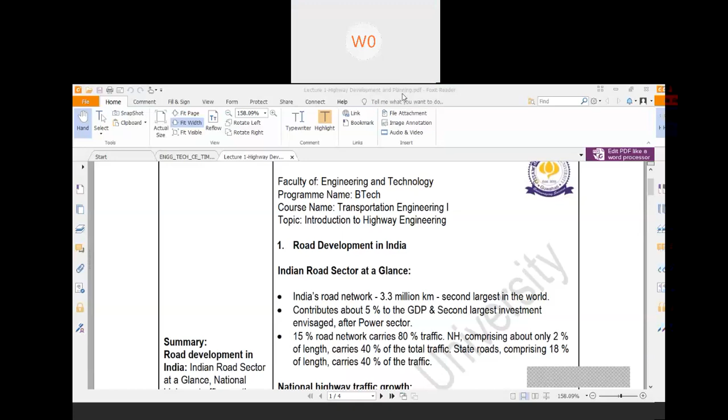Okay. So basically, Sir, yes, sorry, it's not audible properly. Sir, your voice is not clear. It is not clear now. Yes, yes. It's clear. Yeah. It's okay.

So in this subject, we will get to know about different aspects of transportation engineering. Whenever we are talking about transportation engineering, there are different parts of it. First one is surface transportation, air transportation, and water transportation. In surface transportation also, there are two parts, that is highway engineering and railway engineering. This subject will only deal with highway engineering.

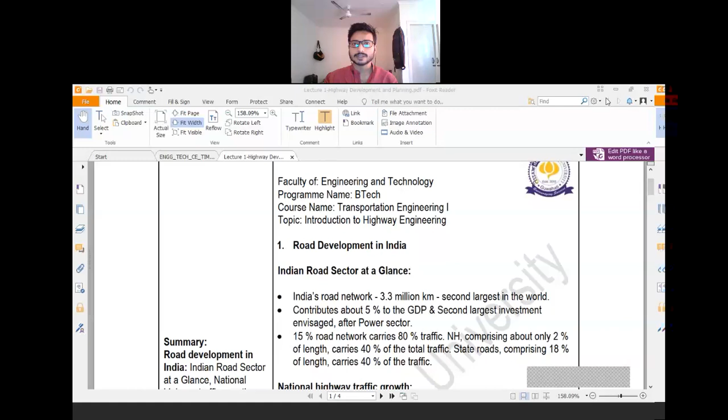Now our first part is road development in India. Before starting this portion, let us discuss the importance of transportation engineering. For the development of any area, transportation is very much vital. Without the improvement of transportation facilities, no place can be improved. For example, let us give a practical example. Suppose your college area, that is Downtown University.

If we consider that area is in a remote place of Guwahati city, now consider if there are no transportation facilities. Like if you consider 5 to 10 years ago, that area was very much remote, and the road development of that area was also very poor. There was no considerable road portion. After the college was established, there was a need for some development.

Okay, why is it needed? Because now accessibility has to be increased, so as to access the university and other facilities. So gradually that area developed. Similarly, for the development of any area, road transportation is very much important.

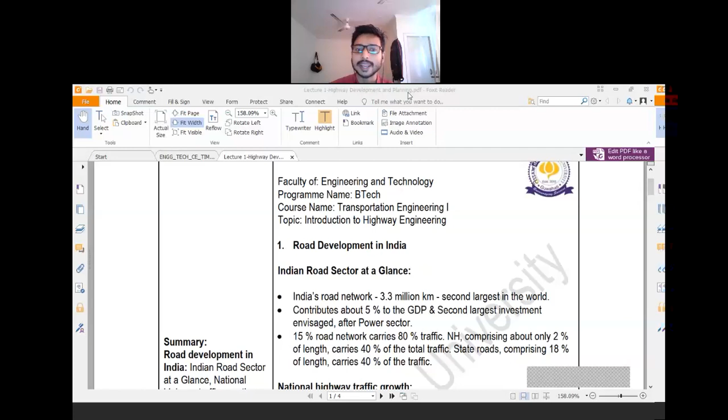The major roads in India are national highways and state highways. National highways comprise only about 2% of the total road length, but carry 40% of the total traffic. From this data, you can easily visualize the importance of the national highway. After that, state highways comprise 18% of the length and carry 40% of total road traffic.

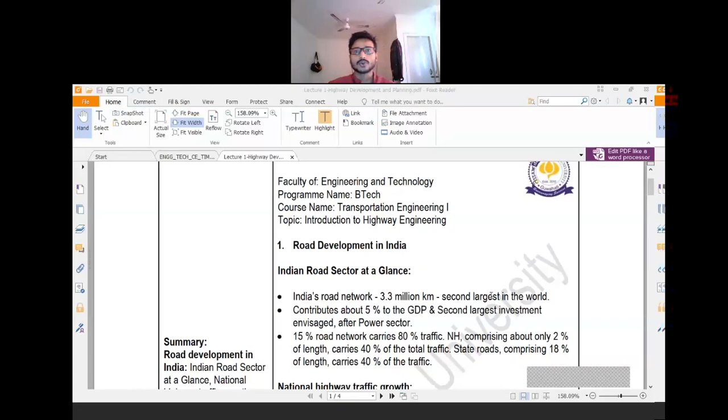Now, if we consider the national highway traffic growth rate, we can see that it is 7 to 10% yearly. For this traffic growth, the number of vehicles is also increasing very rapidly, especially in city areas. For this reason, traffic congestion, noise pollution, air pollution, etc. are also associated with the development.

Another thing is passenger traffic. Passenger traffic is projected to grow by 12 to 15% per annum, and the number of vehicles increases at 30% per annum. These statistics show the condition of road traffic. Since the number of vehicles is increasing at 30% per annum, we have to match that increasing number of vehicles and accommodate them on the road.

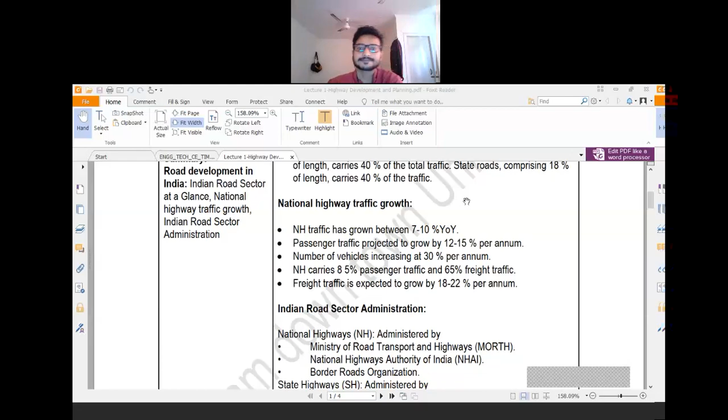Now, different types of roads, that is national highway, state highway, are monitored or administered by different organizations. So first one is national highway.

This national highway is administered by Ministry of Road Transport and Highways, called MORTH, a very important organization. Then National Highway Authority of India, that is NHAI, and Border Roads Organization. Basically, these organizations are responsible for the development and maintenance of the national highway, so they will generally call for tenders and other things.

Then state highway is generally administered by the state government, public work departments, road development corporations, and infrastructure development boards.

Then, if you come for the rural road, these rural roads are generally administered by Ministry of Rural Development, which is directly responsible for the PMGSY road construction. Then state government and rural road development agencies and village panchayat handle small rural roads.

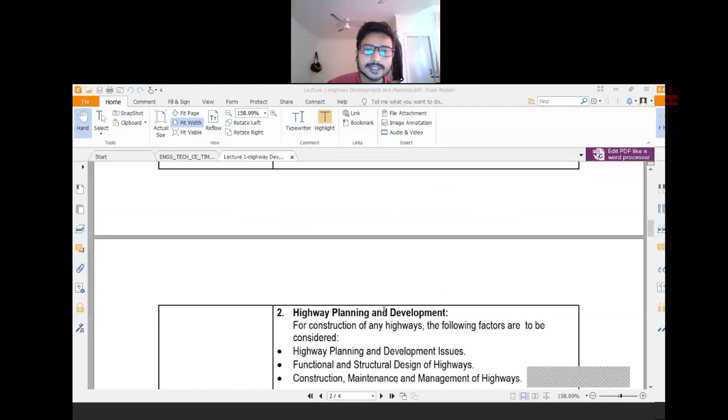Now, for construction of the highways, there are different factors which you need to consider. First one is highway planning and development issues. Whenever you want to develop one particular road, planning and development is a huge thing. You need to plan for that road, keeping in mind that road traffic in future will be increased.

You need to choose the different areas through which your road will pass. So that is a huge development and planning issue, and there are different activities related with it. We'll briefly discuss highway planning and development issues later on.

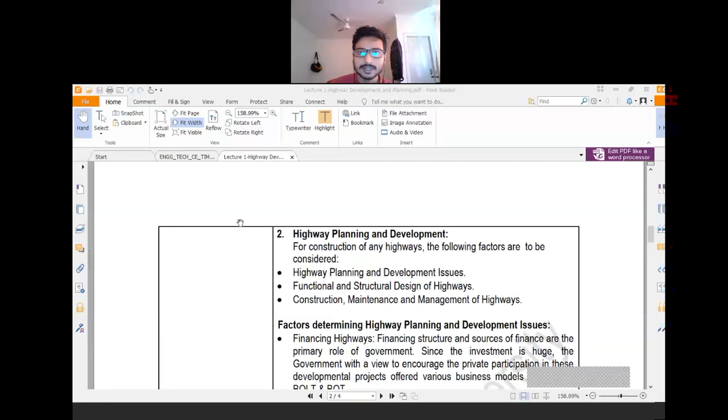Next one is functional and structural design of highways. After deciding the planning portion, the main thing is you need to consider the design of the highways. This design depends on road traffic conditions, number of vehicles possibly on that road, and the condition of the soil and surrounding, if there is any gradient, like if that area is hilly, mountainous, or a plain region.

After that, some issues are related to construction - how you will construct that road, from where you will get the raw materials - and then maintenance and management of the highways. This is a very vital issue. Sometimes after constructing the road, within 2 or 3 years that road gets damaged, so maintenance and management of the highway is a major issue.

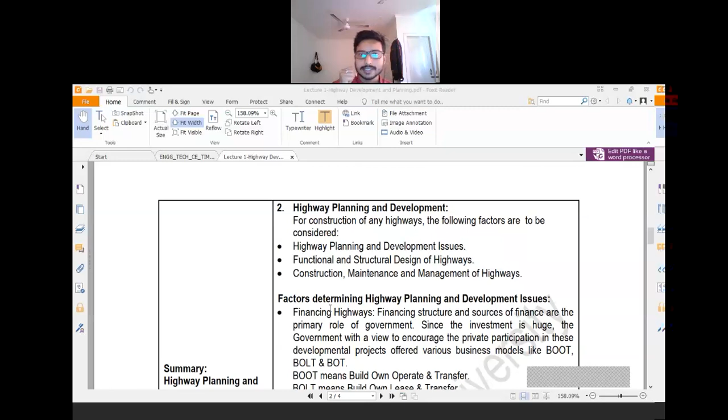Now, factors determining highway planning and development issues. First one is financing issue. Whenever you need to construct a road, huge financing is necessary. Now the question is, who will finance your road?

Who will finance your road? Generally there are different government organizations who are responsible for the financing of the road.

Now since the investment is huge, the government, with a view to encourage private participation in this developmental project, offers a PPP model, that is public private partnership, and they followed different business models. Now these business models may be BOOT, it may be BOLT, or it may be BOT.

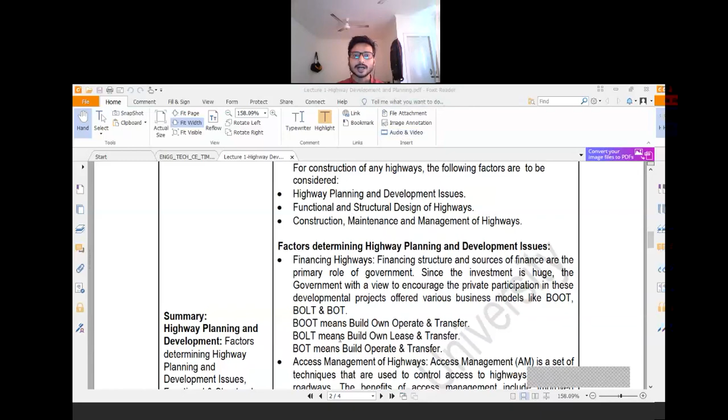Now the question is, what are these? BOOT means build, own, operate, and transfer. In that case, government will build some road. After that, they will lease this property to some private operators, and that private operator will be responsible for the maintenance of that road for a particular period of time.

Now, in that particular period of time, to bear the cost of the maintenance, the private operators will charge some money from the users, that is us, and this charging is generally carried out by the toll plazas. So after the lease period is over, the private operator will again hand over that project to the government.

Now, next one is BOLT. BOLT means build, own, lease, and transfer. In that case, what will happen? The private operator will build some portion of the road.

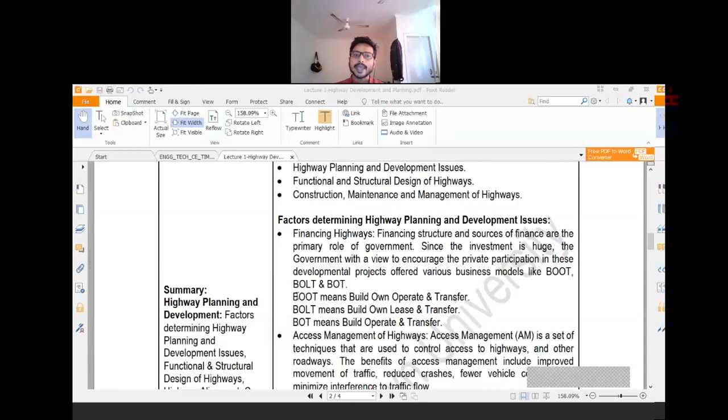After building, they will operate the road and charge some amount of money to use that portion of the road. Generally, this handover, that is this BOLT, is done for 30 or 35 years. After that particular time period, that private operator will hand over the total project to the government.

Next one is BOT, which means build, operate, and transfer. In that case, suppose a particular property is there, and that property is private property. So the government will lease that property, take the lease of it, and use that property by giving some money to the private operator. So basically, these are different business models which they are following for road construction.

Now, next one is access management of the highways. This access management is a set of techniques that are used to control access to highways and other roadways. Access means how you can enter the road portion. This access management is generally used for improvement of the road traffic.

There are different access management tools like signaling systems. This is also an access management tool, or some traffic plazas, or some underpass or overpass. These are all the tools of access management. Now the benefits of access management include improved movement of traffic, reduced crashes, fewer vehicle conflicts, and minimized interference to traffic.

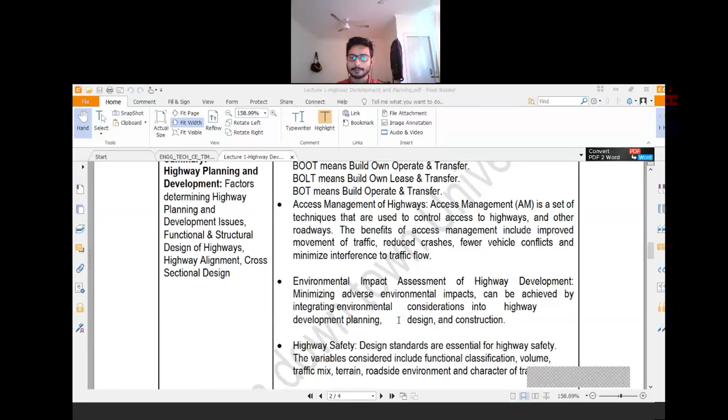Minimizing adverse environmental impacts can be achieved by integrating environmental considerations into highway development planning, design, and construction. So planting different vegetation is one type of development planning.

Then highway safety. Design standards are essential for highway safety. Highway safety means in terms of vehicle operation, road construction, and maintenance. So the variables considered include functional classification, volume, traffic mix, terrain, roadside environment, and character of travel.

This highway safety is also very much important. Suppose you are constructing a road in the hilly area. In the hilly area, it may be possible that you need to cut some of the hills. If that hill portion is not stable, it will lead to soil erosion and other adverse effects during the rainy season. So you need to look for that.

Another thing is you need to design your road based on the road traffic condition, that is the total number of vehicles which you are assuming to have on that road. Suppose you have constructed a road, and that road is very much narrower in accordance with the road traffic condition which can be observed over there. It will lead to traffic congestion and chaotic conditions. So this condition must be followed whenever you are constructing roads.

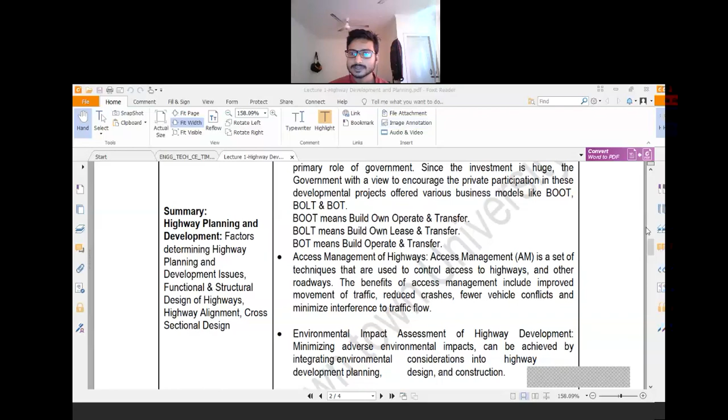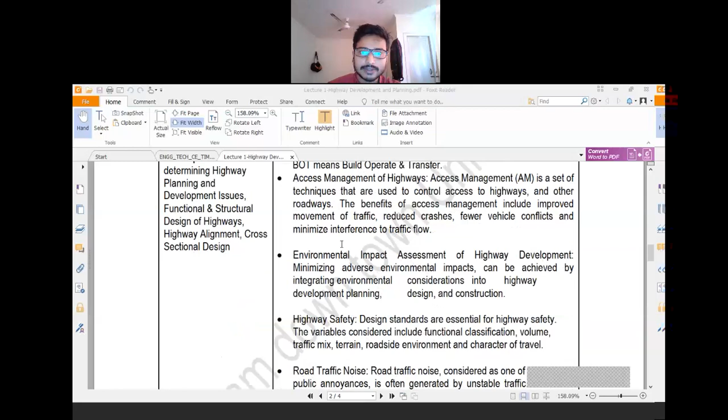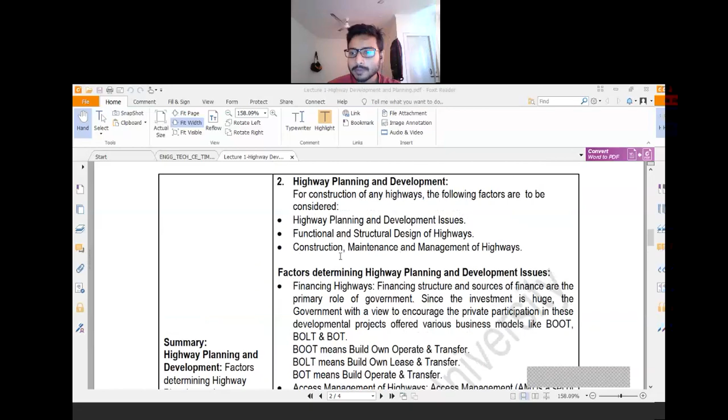Now, this portion we have discussed - the financing of highways, access management of highways, environmental impact assessment, highway safety, road traffic noise - basically all these things are planning and development issues. So before construction of any road, you need to consider all these factors.

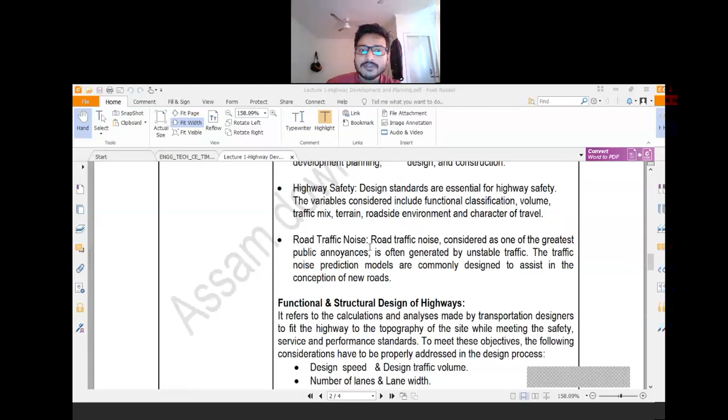So then we come to the functional and structural design of highways. There are different factors which govern the functional and structural design of highways. It refers to the calculation and analysis made by transportation designers to fit the highway to the topography of the site while meeting the safety, service, and performance standards. So based on the topography of the site, you need to design your road, and it should meet all the safety, service, and performance conditions.

Now, to meet this objective, the following considerations have to be properly addressed. There are different parameters which you need to consider whenever designing a road. The first parameter is design speed and design traffic volume. These two parameters are the most important parameters for designing any road.

Because from the traffic volume - traffic volume is the number of vehicles assumed to pass a particular section of the road in a unit time. Generally it is expressed as vehicles per hour. So basically traffic volume signifies the total number of vehicles over a particular road section.

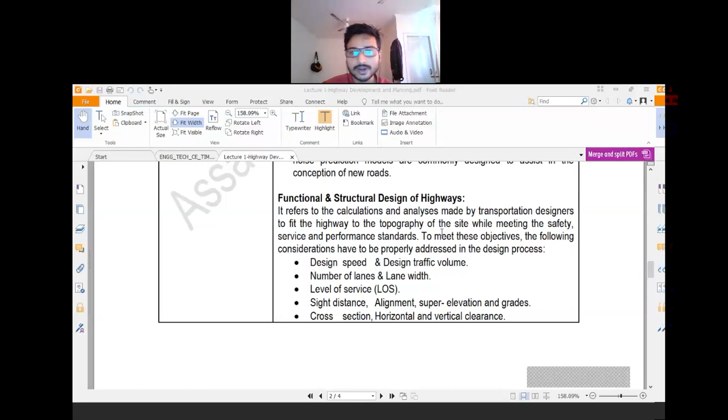Next is sight distance. Okay, sight distance is basically the visibility ahead of you. Suppose you are driving a vehicle. In that case, you need to see what is ahead of you. If you cannot see what is ahead of you, it will lead to an accident. So basically, sight distance is the visibility ahead of you. Now, for the straight path, this sight distance is not a problem at all. This sight distance plays an important role in the horizontal curve section and in the vertical curve section.

So in the horizontal curve, if visibility is not appropriate or not as per the design requirements, in that case the driver cannot see the vehicles coming from the opposite direction, and it can lead to some accident. So sight distance is very important. We'll discuss sight distance, with different numericals and derivations, in the later chapters.

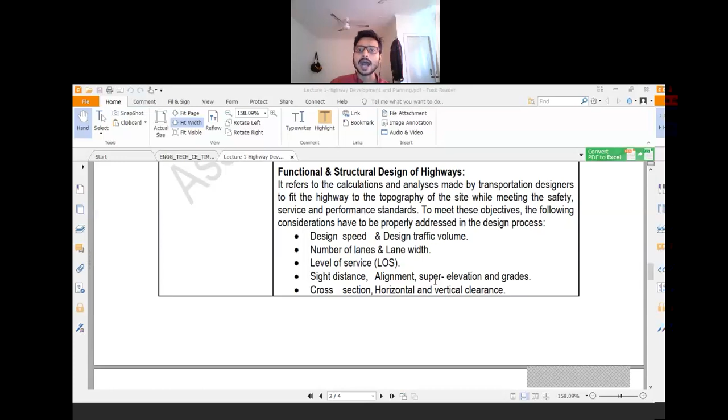Then alignment. Alignment is the central line of the highway. Then super elevation and the grades. Basically, super elevation is the portion of the highway which is raised in comparison with the other side of the road to nullify the effect of the centrifugal force in the horizontal curve. Later on we'll discuss super elevation; there are some derivations and numericals. Then grades. There are different types of grades, that is ruling gradient, plain gradients, etc., which we'll discuss later on.

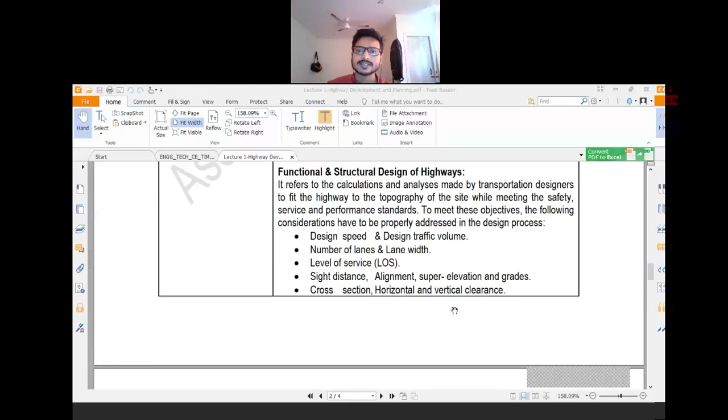Then cross section, there are different cross sectional elements, horizontal and vertical. Clearance or sight distance, these are the same thing.

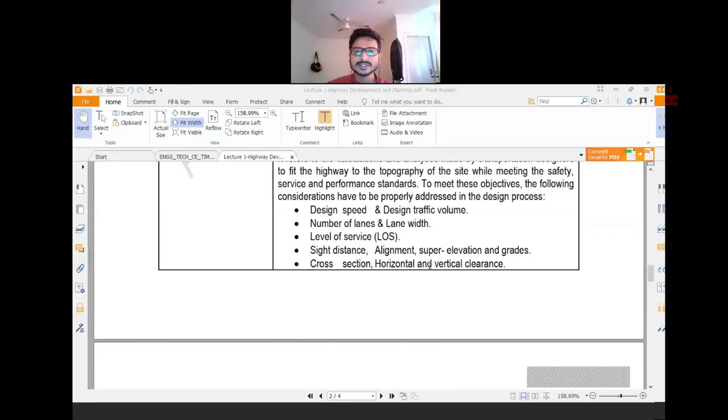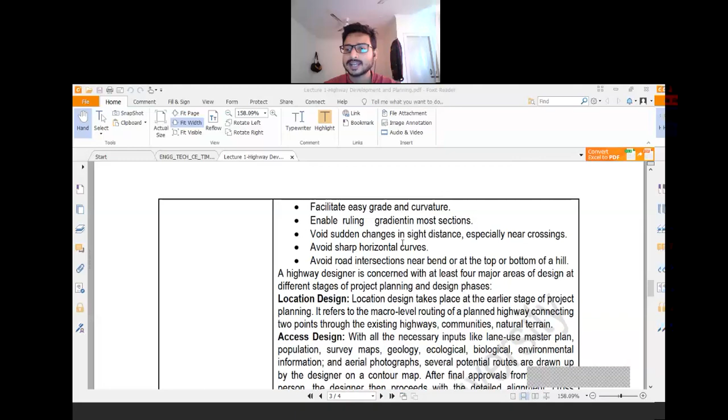Now coming to the next, facilitate easy grade and curvature. Whenever you are constructing a road, you need to provide easy grade. Easy grade means, suppose you are constructing a road in the hilly areas. Often you have seen that roads in hilly areas are generally in a zigzag motion. So why is this so? This is basically to accommodate the easy grading of the road.

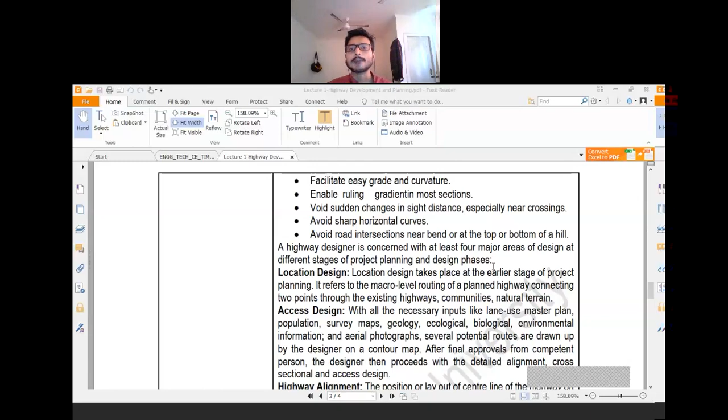If it is constructed in a straight way, there would be too much up and too much down, and most of the vehicles cannot operate in that condition. So there are different standard parameters for the grade, and whenever you are designing a road, you need to consider those standard specifications. Now, enabling ruling gradient in most sections. We'll discuss this later on.

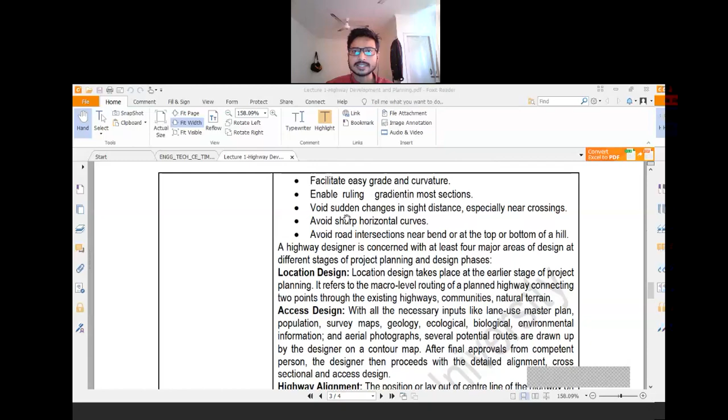Avoid sudden changes in sight distance. Avoid sudden changes means, suppose in a straight highway there is enough sight distance, and suddenly one horizontal curve appears, and the sight distance has not gradually decreased, but suddenly decreased. So what will happen? Suppose this is a straight highway and you can see ahead of you for a greater distance. In that case, it is possible that you will adopt a higher speed on that road.

So if a horizontal curve appears, you will generally keep that speed, and it will lead to problems, because in the horizontal curve, if there is no considerable sight distance, it can lead to traffic accidents.

Then avoid sharp horizontal curves. You need to avoid sharp horizontal curves so that adequate sight distance can be provided. Another thing, if we provide sharp horizontal curves, the speed of the vehicles will be considerably less over that area, and the action of the centrifugal force over that curve will also be much higher. So in that case you have to provide a higher super elevation.

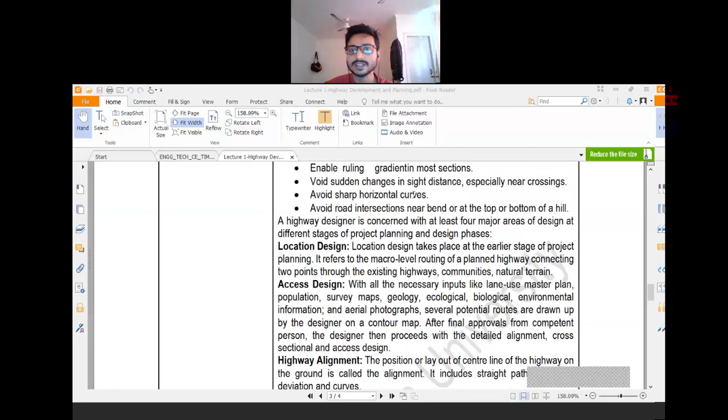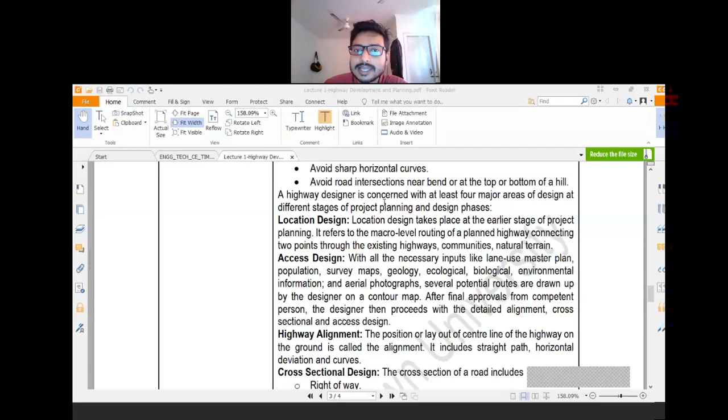Now, next is, a highway designer is concerned with at least four major areas of design at different stages of the project planning and design phases.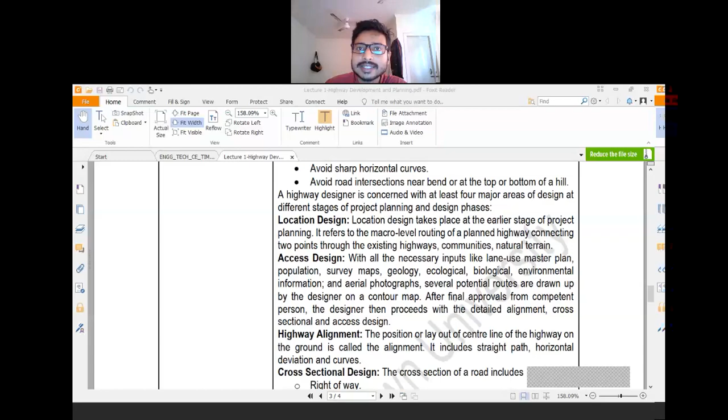Now, these are the four different phases. First one is location design. So basically, location design takes place at the earlier stage of project planning. It refers to the macro level routing of a planned highway connecting two points through the existing highway communities and natural terrain. So basically through this location design you will get to know through which points your road will pass.

So basically in the location design there are different parameters. In the location design you will go for a map study for a particular area. From that map you will get to know or have a rough idea about the topographical condition over that area. Based on the map study, you will suggest different alternative roads to connect different cities or locations. So this is the location design. You will study a map or you can design that location based on the aerial survey, aerial photography survey.

Next point is access design. With all the necessary input like land use, master plan, population, survey maps, geology, ecological and environmental condition, etc., several potential routes are drawn up by the designer on a contour map. So you know about the contour map. After final approvals from the competent authority or competent person, the designer then proceeds with the detailed alignment, cross-sectional and access design. So these two parameters come under the highway survey for highway alignment. We will discuss this in our next 2 or 3 classes.

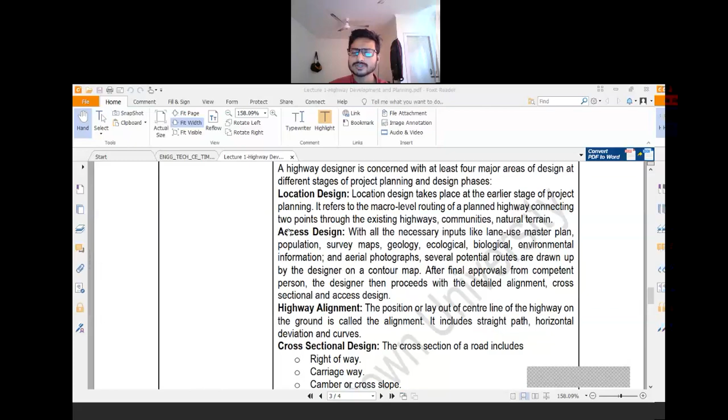Then highway alignment. Highway alignment is the position or layout of the central line of the highway on the ground. You know how to do this alignment; you have done this in your survey class. For the highways, you need to lay out first the central line. After that, you will decide the width of the lane and then go for the side portion. Generally highway alignment includes straight path, horizontal deviation and curves. So these are the things.

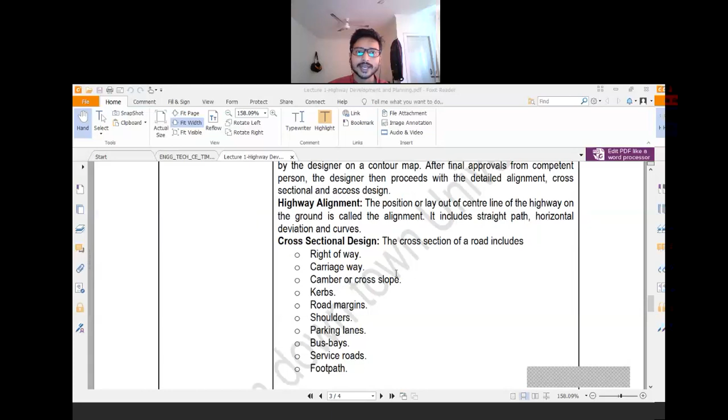Then coming to the next point, cross-sectional design. There are different elements of the cross-sectional design. These are right of way, carriageway. Right of way is basically the total land acquired by the road transport authority for the expansion of the road for future development. Carriageway is basically the blacktop portion of the road on which the vehicle traffic is moving. Then camber or cross slope. Camber is basically the raised portion along the center line of the road, provided for drainage purpose. Then kerbs. Kerb is basically the boundary between the road and the shoulders.

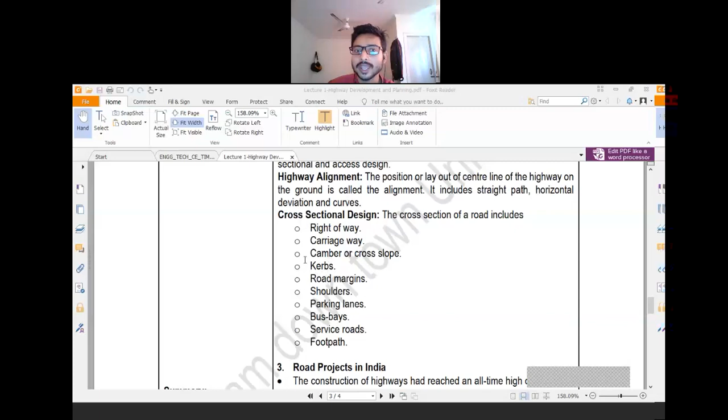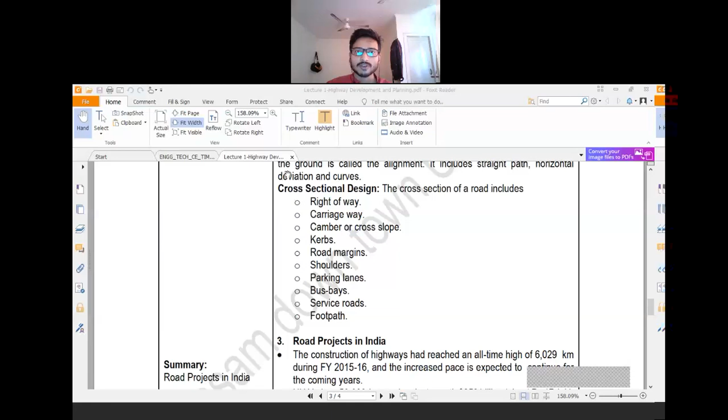Then road margins. Shoulder is basically, you can term this as a footpath. Then parking lanes, bus bays: in some roads designated places are there for the buses to park or for passengers alighting and boarding. Then service road: in some portion of a highway, another small portion is allocated for service. Suppose one vehicle got damaged, in that case you can put it in the service road and wait there for the maintenance. Then footpath; footpath and shoulders are similar in some cases and different in others. We'll get to know about all these things in our next class.

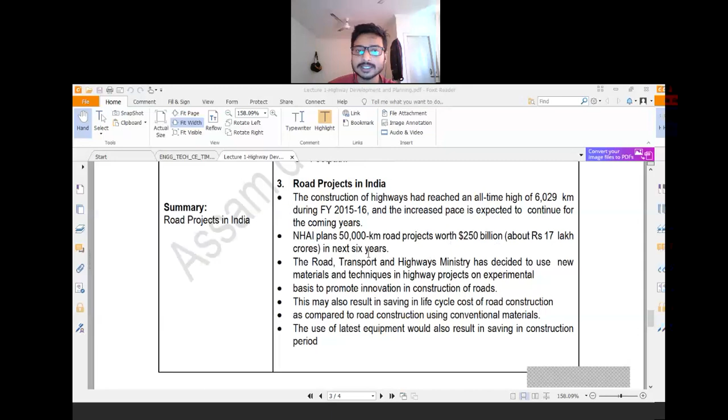Now coming to the next, that is road projects in India. The construction of highways had reached an all-time high of 6,029 kilometers during fiscal year 2015-16, and it is expected to increase at a higher pace. National Highway Authority of India plans 50,000 kilometers of road projects worth 250 billion in the next 6 years. The Road Transport and Highway Ministry has decided to use new materials and techniques in highway projects on an experimental basis to promote innovation in the construction of roads.

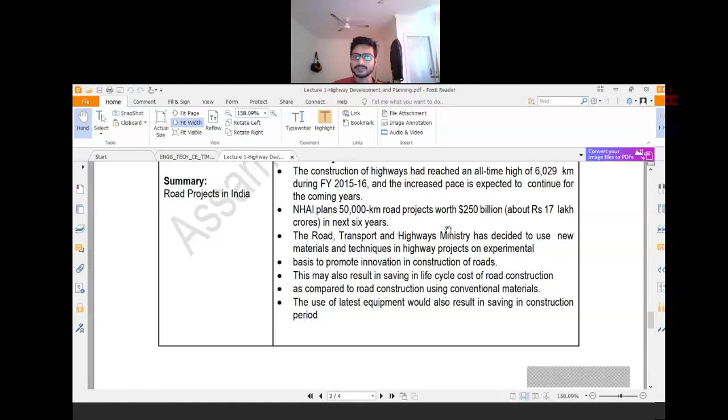Let me give one example of this innovation. In hilly areas, previously the road was constructed as per the traditional method. But now, in some national highway construction, I have observed that to increase the stability of the road, they are using some different new techniques. They are using geofibers and geotextiles to increase the stability of the road. These are different methods which will enhance road development. The use of the latest equipment would also result in saving construction period. These are the links which you can follow.